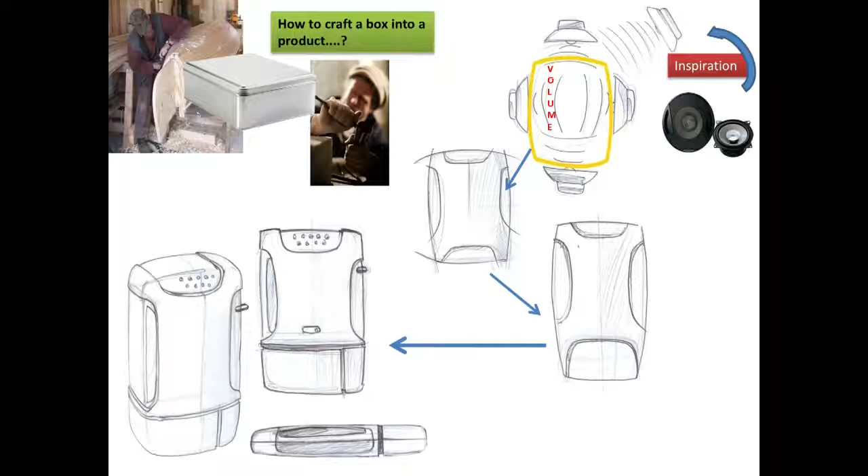Volume units are slightly different from the other meter. So this I had explained to you in detail.

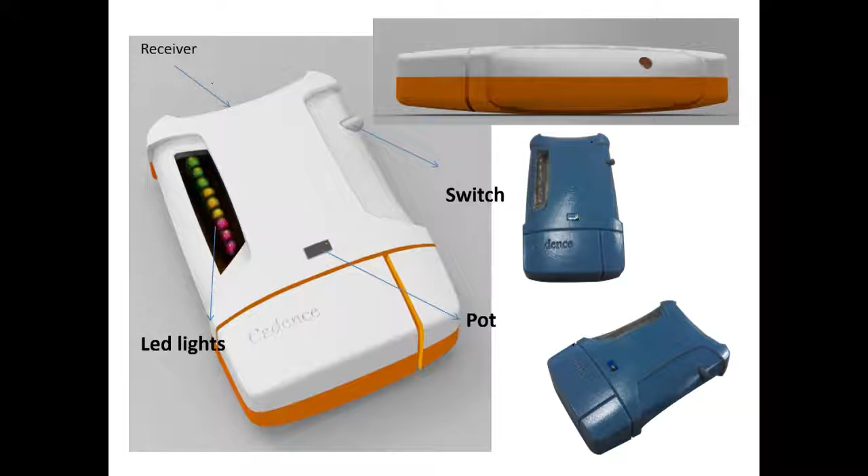Next project, eventually this whole concept here - you will notice that there is this beautiful concept, and then it has been implemented. We have a product which results from this, and in this case it is organic also. So I have taken you a very extreme example.

I will take you to other examples which are more commonplace. This particular thing, of course, has a little problem from the legal point of view. One of them is that here in India we use bottled LPG, that is liquefied petroleum gas.

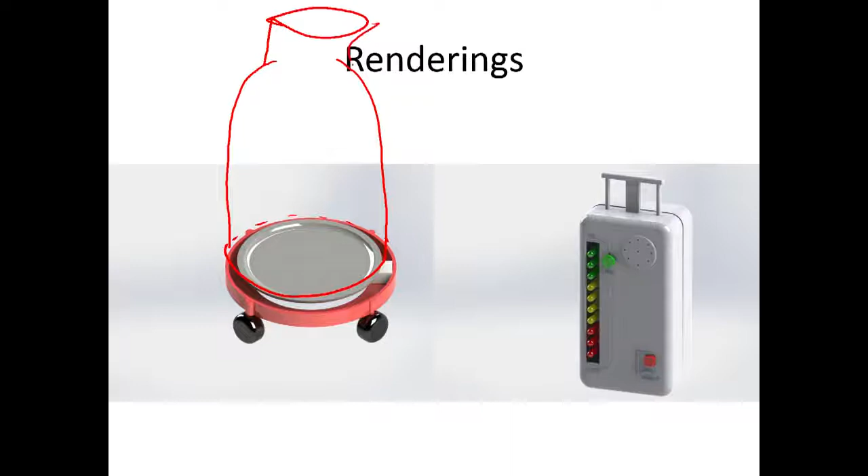The problem with any liquefaction is that very rarely does the pressure change. If you take - let me try to draw a picture of a bottle here. This is typically how LPG bottles, or in our case we call it a cylinder, are used in the environment.

Sometimes it is under what they call the kitchen counter, sometimes it is outside. The issue is that there is no way of fitting a simple Bourdon gauge or equivalent meter which will tell you how much gas is remaining.

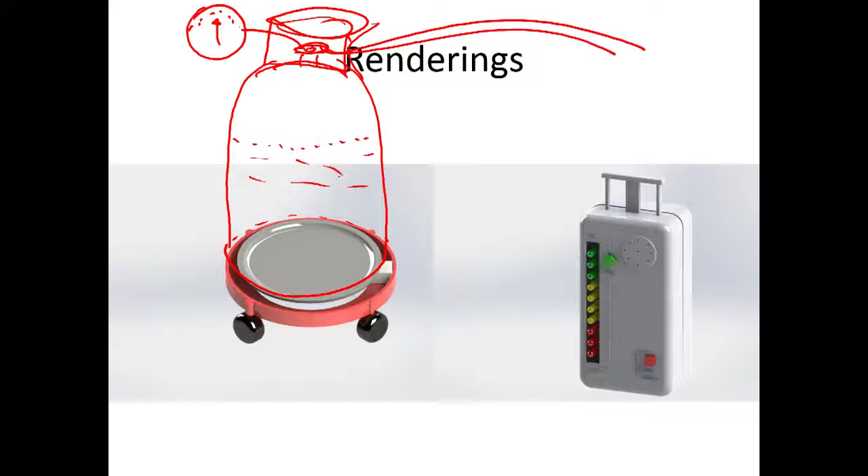Because at any time, if this was the level of the LPG inside, this part will be the gas, this part will be the liquid, and it is filled under a pressure which will ensure a constant supply.

This device which is on the top is called a regulator, and this regulator ensures that the pressure is lowered a little before being supplied to the cooktop, or in our case what we call a burner. So, as such, this pressure is constant all the time.

Only thing that does change is the level, and consequent to this level we have the total volume, and a quantity which is proportional to this, which I will call here weight.

Let me not go into the thing about saying is it kilogram force and I use newtons and why all that, because over here we just go by kilograms directly. That is what everybody understands, and I think some part of the world they have pounds, and then I do not know other places.

The issue being, as the gas is consumed, the weight changes. That is the only physical parameter that can be easily reliably measured. There are other things also, saying this meniscus is usually a little cooler than the ambient because evaporation keeps taking place here. So there are LCD strips. If you stick the strip on the side and all that, it is okay. It is supposed to indicate the liquid level.

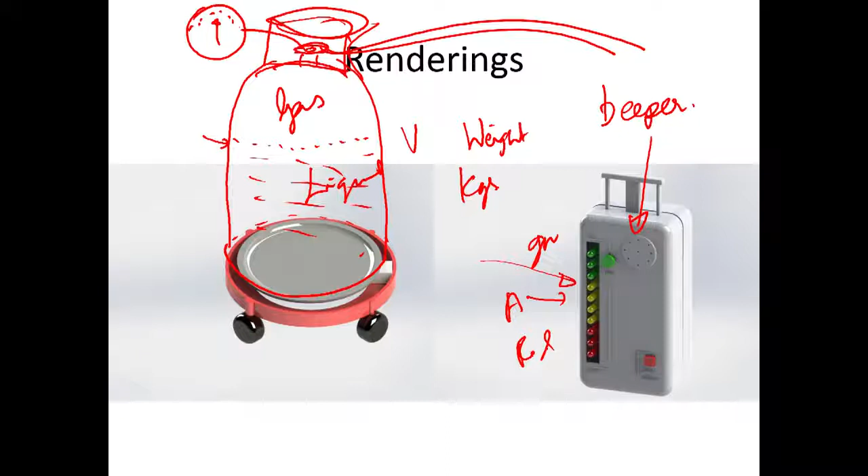And then the way these things have been made, the moment you open the cover, it is easy. We can go ahead and independently test this device. You can put it here and nothing is attached, which is why I wanted to show you here. This is fully testable. There is nothing hanging around, there are no wires attached to this.

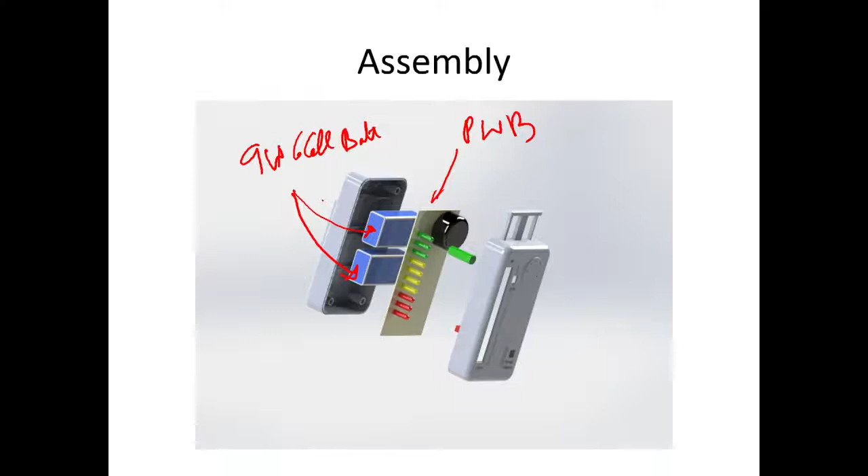And then if you see these two cells also, the cells are probably attached to this either by a separate small jump cord, or they can be part of a battery door here, and then you have clips. So those clips will... I will try to erase it and start.

If you ever used this 9 volt battery, I think you will know what I am talking about. So it is possible for me to use them in series to get a little higher voltage, or alternately I can use them in parallel. And then there is a small connector wire which is there. So I attach this here and I attach this here, and then I am in business. It is not very difficult to make.

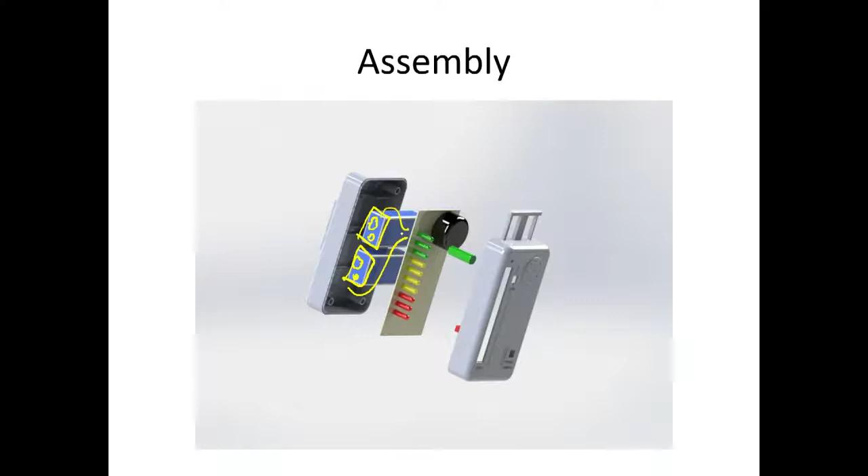Making an enclosure like this is not very easy. In subsequent lectures I will cover how to use a standard enclosure for this. So this is how it is expected to look.

Now, slowly, can you see some elements of, I will call it, good and bad. Good is it is implementable. This particular thing was a load cell, okay.

It is a beam with a load cell which is available in the lab where our students are working. You do not need all that right now. You can probably have a tray on which you can do it, and then you see this beautiful look of this device - that is more to scale. It also looks a little like the LPG bottle.

There is a safety ring here, something here to hold it, and you can also use it like a handle. It looks a little like the LPG bottle. So in principle we have a beautiful product. If we want, we can connect wires, otherwise we can make it wireless. In this case, what they have done is discreetly taken wires from this, taken them out, brought them here, and connected them. Later on, after a little while, I can even see it goes here like this and comes.

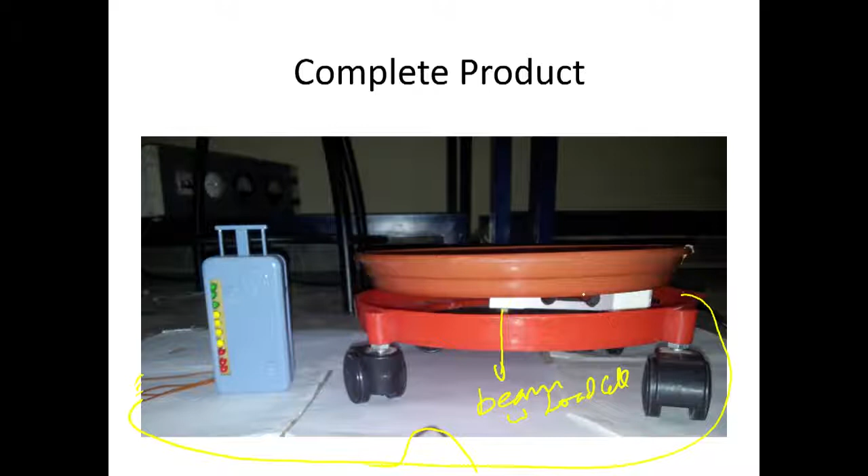It has been found out that anything where a potential can exist here is banned by safety regulations. So this cannot be done. Something else has to be done.

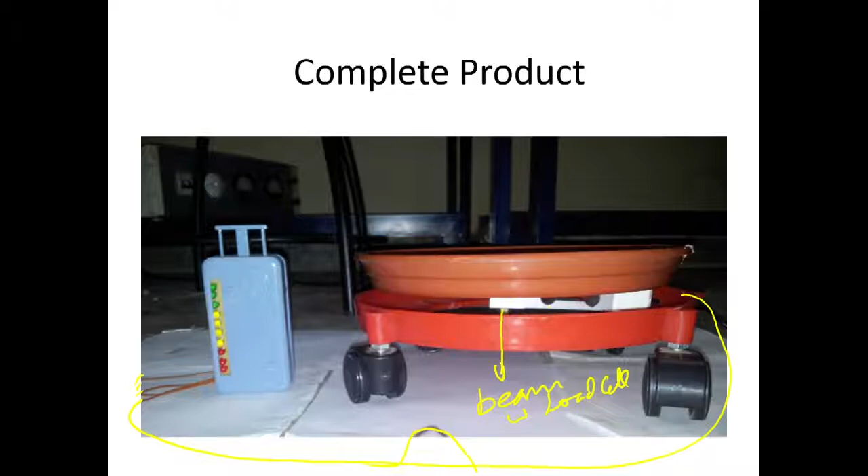We can probably make a flame proof or explosion proof device which can be connected wirelessly to this. And how do you get power from it? It should not be powered directly; we have to use some kind of power system, try to do a bit of energy harvesting as and when we need it, or it can be a passive RFID device. Like when I switch off the gas and turn off the regulator, I take this and put it near and read the RFID value, which is a little like the small tokens issued when you want to enter the metro railway station. You have a turnstile and this token, which I showed you yesterday, that has all the information. It is not very big, and once it is inside, it does not cost you anything. Which takes me to the next few slides.

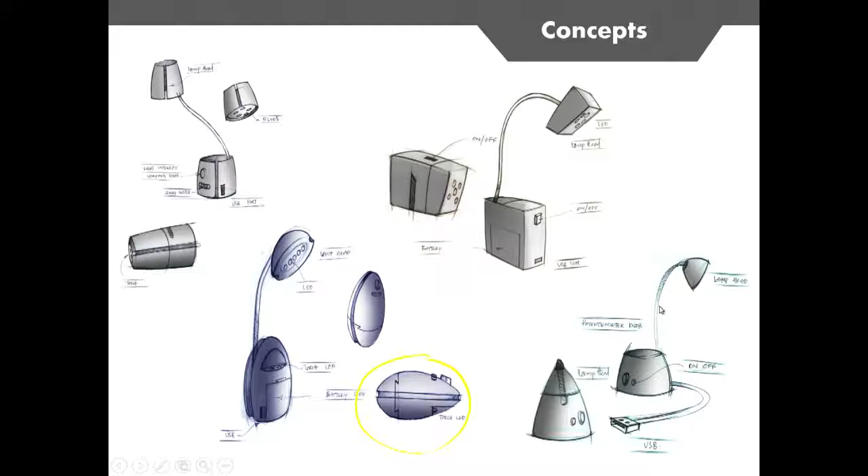They have made it finally. See, this is where the beauty is. These are all the concepts which they have worked out using, yes it is written, I can't bluff, some Illustrator package. In our case, on our premises, most of the packages have student licenses or a number of seats, so our students have access to it.

Then you see here all the features which are there, and you can use it, and you see the color and all the various objects - after you take it out, it just stays there without falling off. You see there is a blue combination, and then a red combination, and the most important is it is self-explanatory that you have a dovetail and you keep it underneath this. You can use it like that. In case you don't want it, you can probably use it as a torch and emergency light.

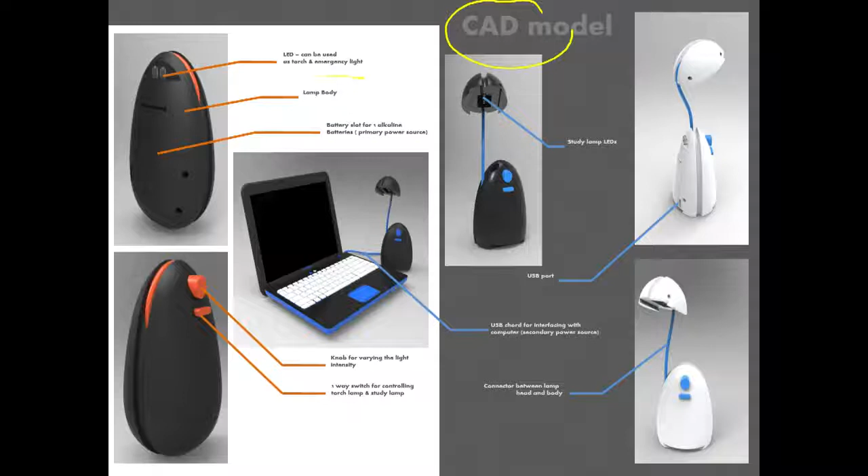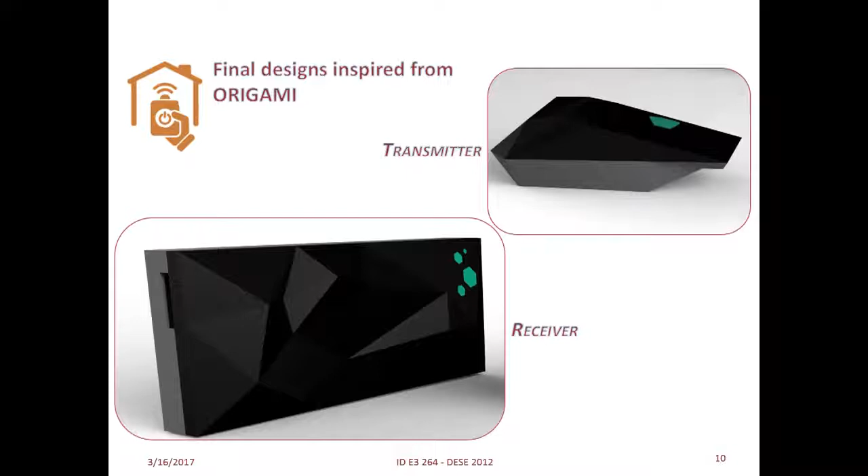I will now come to the next thing. You see here, I don't know why they call it a glomp, there is some reason for it, I will check with them and get back to you. Oh, they have a beautiful origami-based transmitter and receiver. I don't know what this thing is, except that this being an open environment, people can try out their various options. Somebody has come out with a device - I don't know whether it is a remote, or a forget-me-not aid, or a docking system, or anything.

Once when I asked the student, he explained that the transmitter is kept in his bag, and he has this receiver. One of them, which is larger, is carried around. The smaller thing is kept in the place which needs anchorage.

Instead of loosely tying it with a cord like this, you see here I have a huge cord. Well, it's all right, absolutely no problem about it. But we have a serious problem often, people walk away with it.

I wish somebody made a device which will beep me, or even zap me, or maybe use more violent devices to control me, to make sure they are not separated beyond a distance. The moment it crosses a distance, if I get a beep, I know I am going beyond the limit. So it is one of those devices.

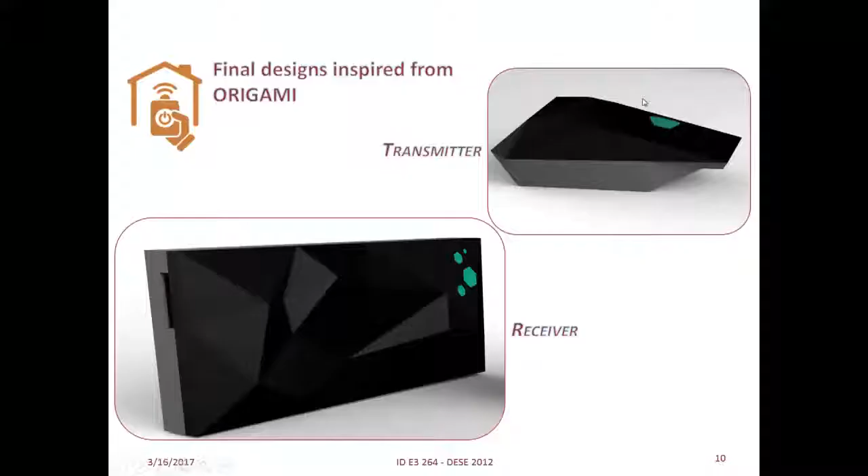In this case, because they had to make sure they have the thing already, they tried to make it a little big, but the scale is not known here. This I had explained to you a lot yesterday.

We have more and more beautiful devices. So it was also submitted as part of a device for part of this rapid prototyping.

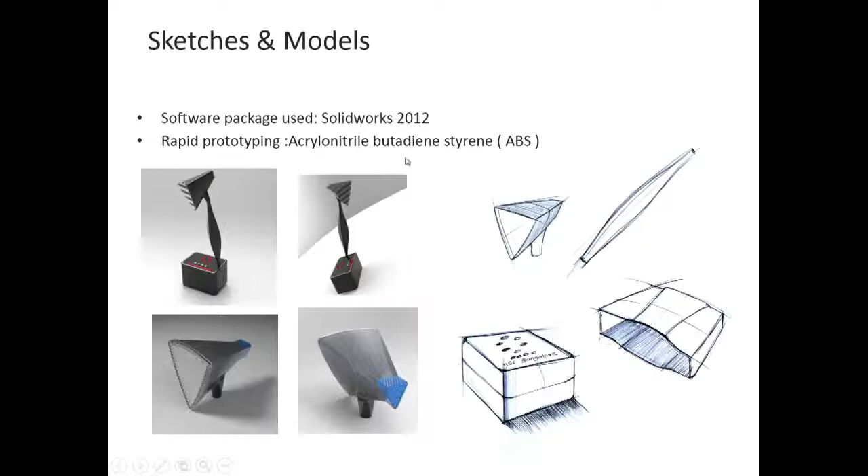So you can see it again, the good old Watchdog. I avoided mentioning the whole thing as to why it is called a Watchdog. In the case of our microcontrollers and all that, we have a small issue about it, let's say use it in a critical situation where monitoring is very important.

Imagine we have one of these small microcontroller devices attached to a patient monitoring system. What if the microcontroller itself fails? So we don't know whether it is true or false, true or false. The condition is whether it is to be displayed or not to be displayed. So we have this issue of getting a proper response.

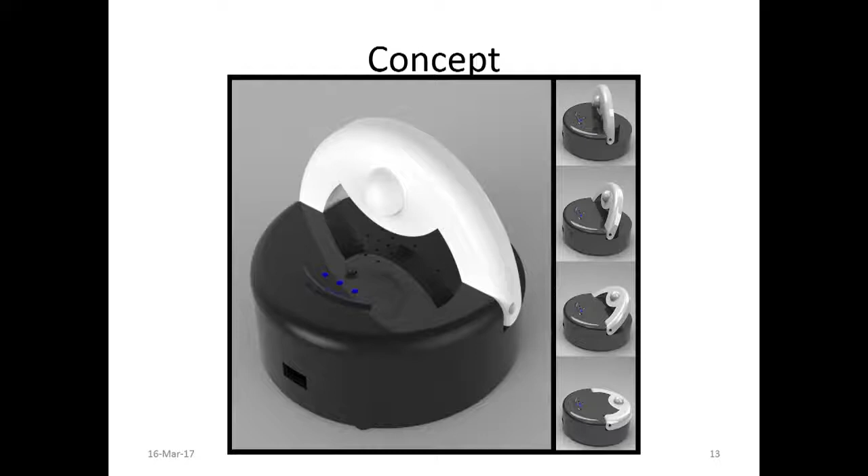So something called a watchdog timer is usually implemented in these devices. In case the code freezes, the watchdog timer operates at a different level. I don't know if it's high or low priority, but it takes control and, seeing there is no activity, runs as a parallel process. As soon as there is no activity, we will be able to get an indication.

So that whole thing about the watchdog timer came about because nobody can disable it. The moment something happens and it loses power or anything, before that it also signals that it has failed. That is how the term watchdog timer came about.

This slide I had shown you yesterday. I will come back to one of my favorites, this Lumi, and the various things that have played out with that Lumi here - product sketches, various operations. Now let me take you back to a small device here.

Good old quill. And if somebody says it is a pen knife, they are not going to cut your pen, you can't chisel your pen with it. It all started with people trying to take various types of quills and sharpen the end, then dip it in an ink pot and start writing.

Good concept, is it not? Our Lumi also is a little like that, except that here whatever my good, intelligent and very perceptive students have said is, sir, it looks ugly, why don't you use something good?

I have shown you that origami device - I have no clue what it is, but this student is fascinated by origami. The beauty of origami is that they are all planes, and by simple folding we try to get objects: a boat, and this beautiful small baby elephant, and various others depending on how you do it. He has developed on these themes, making an object which contains various objects in it, because he is fascinated by planes.

But why a plane, just a plane, why not organic, and why planes? One beauty here is that organic structures are not that easy to reproduce if you want to use cardboard or sheet metal, because by definition a sheet is flat, and any other modification involves a different type of manufacture. Making these things is very easy for us if you orient it properly - it is easy to make an inclined plane and something related to it.

The advantage of an elemental triangle is, in space if you have three dots - dot here, dot here, dot here - these can always be joined in a plane. Any three dots can be coplanar. I do not know the full mathematics, my apologies for my ignorance, but even a mesh - all meshes in our computers are made exclusively by breaking them into triangles.